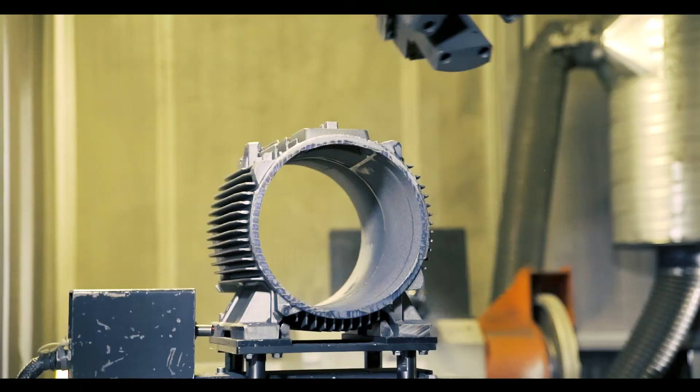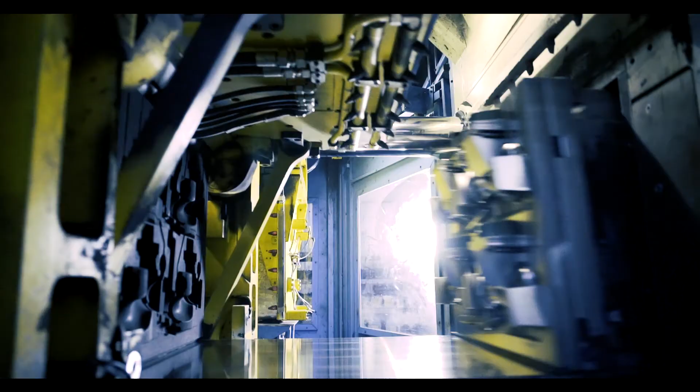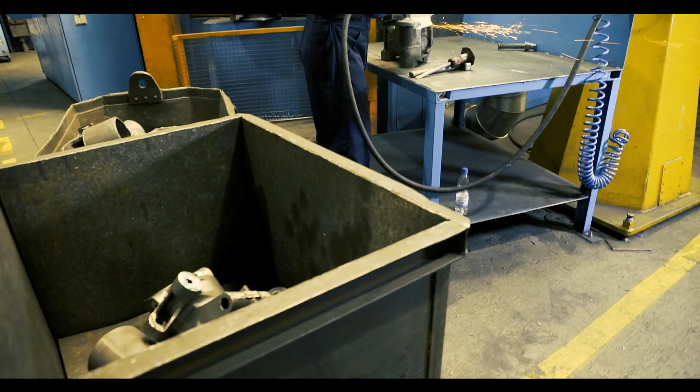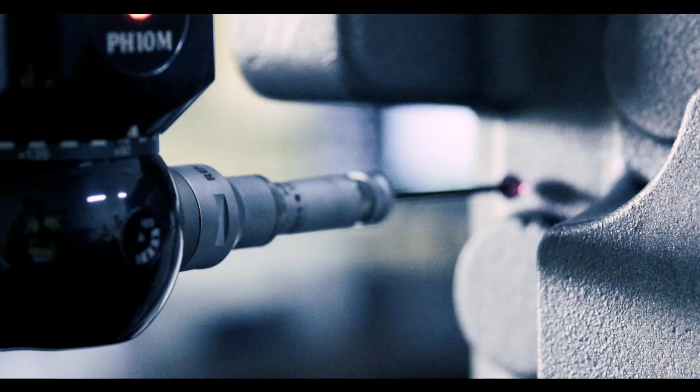Odlewnie Polskie SA is one of the leading service foundries in Poland. As a private joint stock company, it has been operating on the market for 25 years. Thanks to the high quality of products and numerous contracts, the company has for many years been able to continue its sustainable development and make investments in modern technologies.

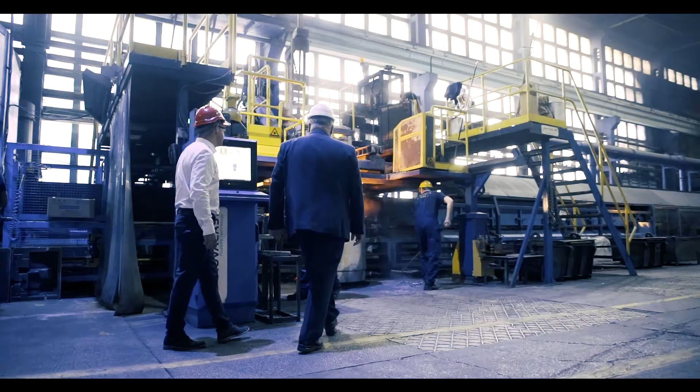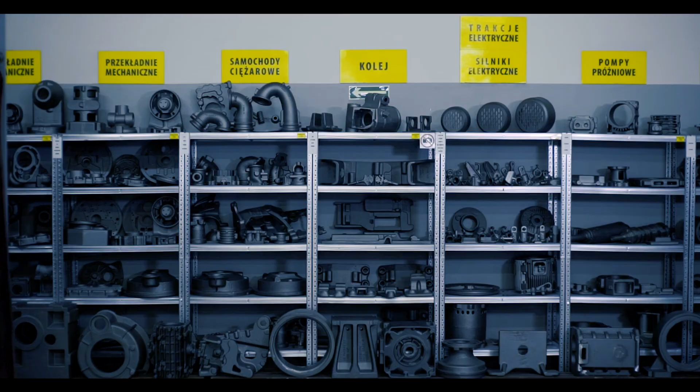Today, our foundry produces high-quality spheroidal cast iron and ADI, complex castings for cars and trucks, the railway industry, construction and agricultural machines, fittings and pumps. We sell them to almost all European Union countries, the United States and even China.

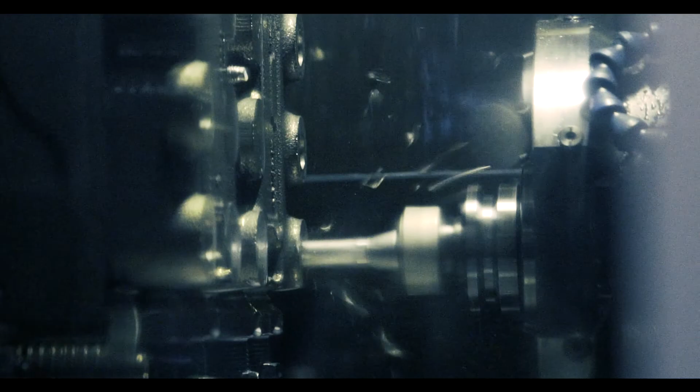Sustainable development is our motto, which we understand as investing in all areas of our operations. The result is a dramatic change in our plant over the last 25 years. A modern technology park, professional staff, and products that are 80% exported to foreign markets have allowed the company to build a market advantage.

Corporate social responsibility is as important to the company as operating in order to achieve planned profits. Hence, many actions are taken for the benefit of the local community and ecology. In order to protect the natural environment, Odlewnie Polskie implement the Green Foundry program, taking care of order and cleanliness of the environment. The location obliges.

Starachowice are situated among the exceptionally picturesque landscape of the Świętokrzyskie Mountains, the oldest in Poland. The foundry traditions of the Starachowice region date back to the end of the 19th century. In this picturesque region, in 1899, the blast furnace and the steelworks, which gave rise to today's foundry, were established. Today, the blast furnace is in a state of rest, providing an interesting tourist attraction.

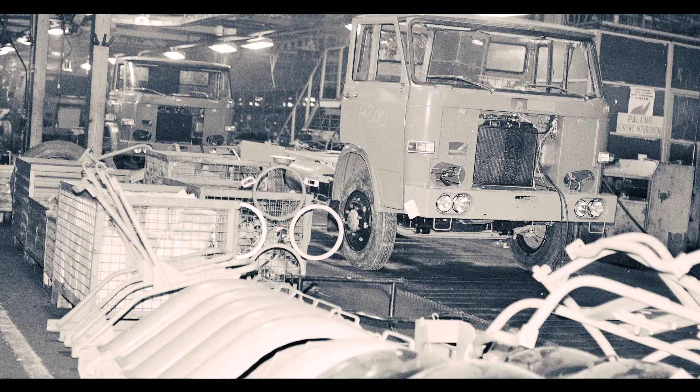After the First World War, in the interwar period, foundries as part of the Starachowice plant belonged to the Central Industrial District. Castings produced at that time were made for the benefit of the armaments industry. After the Second World War, the plant became part of the truck car factory, and until 1993, almost all castings for Star trucks came from the foundry in Starachowice.

Between 1993 and 2001, Odlewnie Polskie belonged to the Exbud Skanska Capital Group, and since 1998, the company's shares have been listed on the Warsaw Stock Exchange. In 2002, OP Invest became a strategic shareholder of Odlewnie Polskie SA, whose shareholders are the key management of the company. Thanks to this change, in 2005, a comprehensive modernization of the foundry was started, which has been the realization of an investment exceeding the value of 32 million euros.

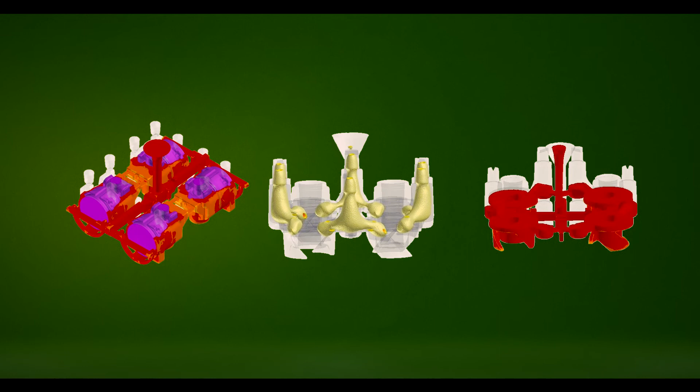It is thanks to these investments in new technologies that our castings are delivered to customers from the European Union as well as to Switzerland, Norway, the United States, and the Far East. Thanks to its technology, experience, and specialized staff, the company offers complex castings made of high-quality cast iron, processed to the maximum with mechanical processing or partial assembly.

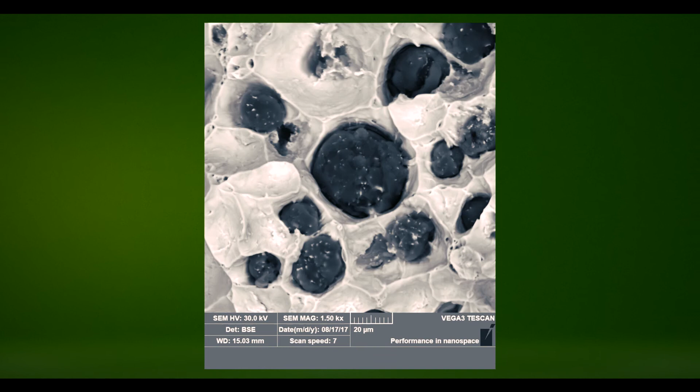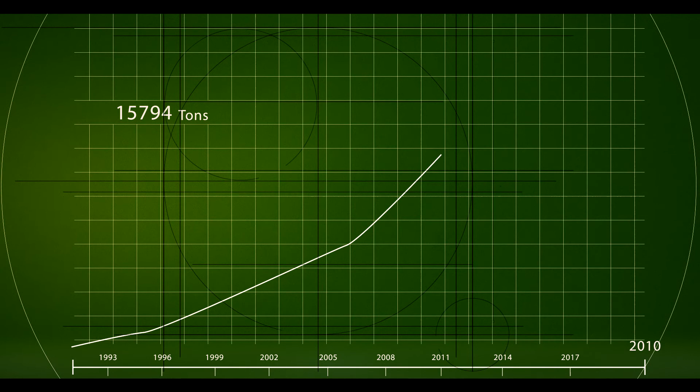Odlewnie Polskie SA belongs to the leaders in the production of ductile iron castings in Poland. The production also includes products of grey cast iron, SiMo, and ADI, of which it is the only producer in the country and one of only a few in Europe. The production of the foundry reaches 20,000 tons of castings per year, and thanks to the investments, the production capacity is constantly being increased.

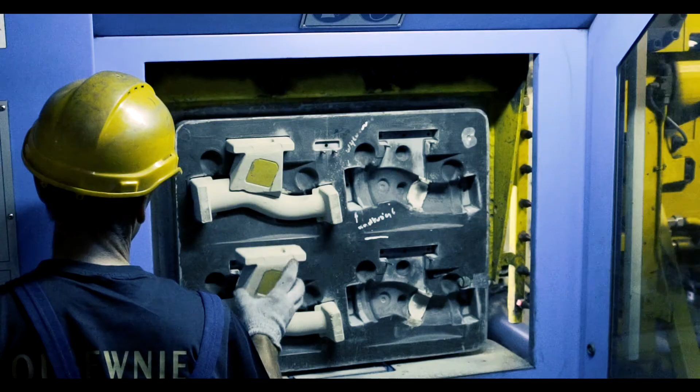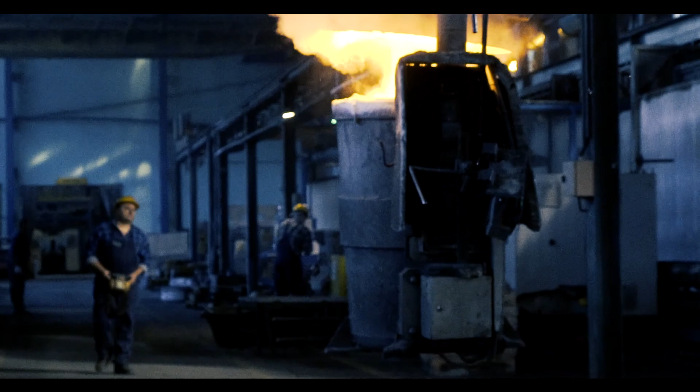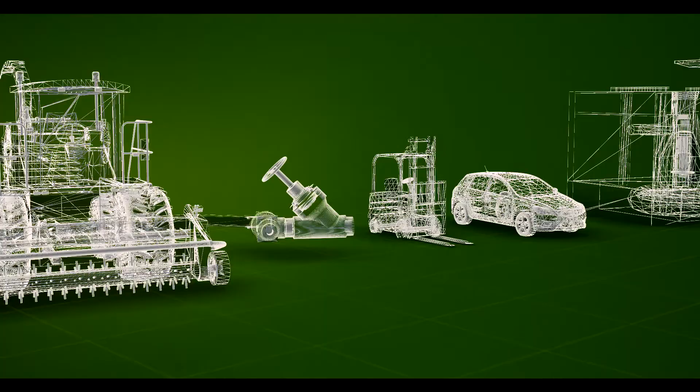Apart from mass production, the company also carries out short and medium series with on-time delivery and prototype castings, engaging in designing and improving the products of its customers. Odlewnie Polskie SA has a very diversified order portfolio. They provide castings for many industries, including truck, rail, construction machinery, agricultural machinery, fittings, forklifts, passenger cars and trucks, power equipment, and many others.

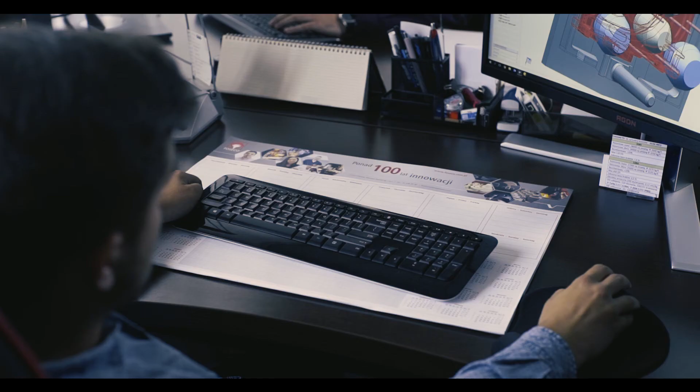The company offers comprehensive customer service, starting from design using modern computer software CATIA and NX Unigraphics, supporting production. The use of specialized software makes it possible to offer customers changes that improve the product in technical solutions and to optimize the production costs and properties of castings. In this way, in addition to meeting the strict requirements of customers, the company tries to offer them a better material, better quality, and accuracy of workmanship.

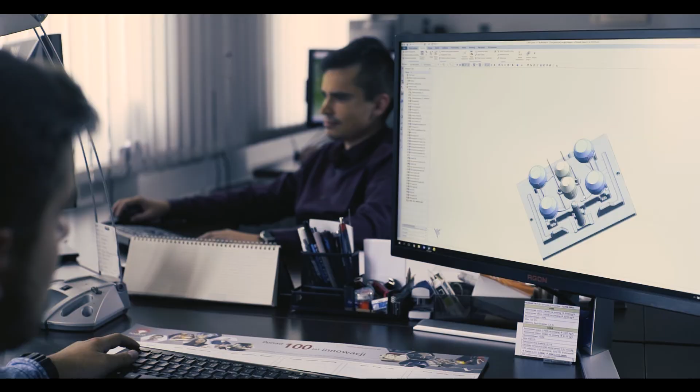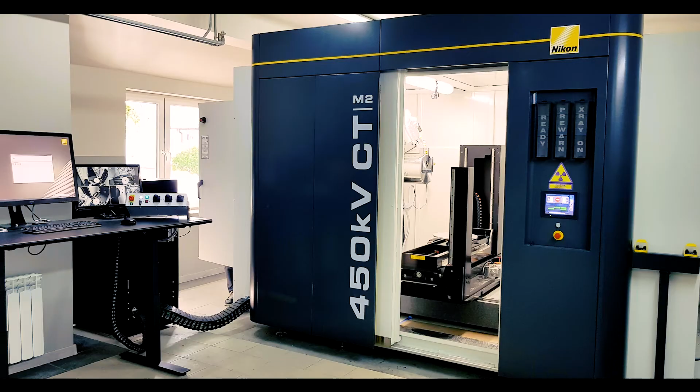ProCast computer program for simulating the process of pouring and solidification, and thus for optimizing the filling systems and analyzing the structure in terms of stresses and deformations. This reduces the time it takes to design and start up new parts and reduces so-called production shortages. The production startup process uses a Nikon CT scanner, which allows a practical assessment of the design technology.

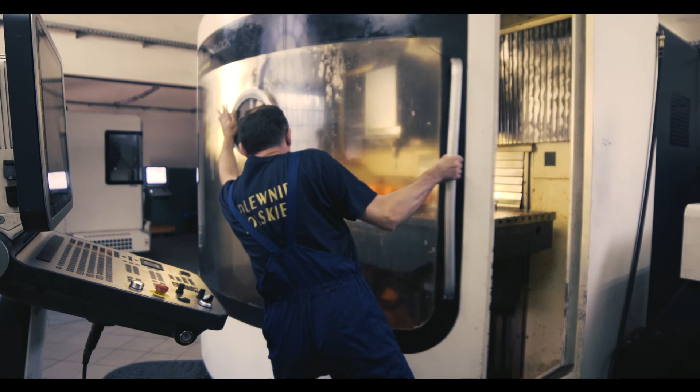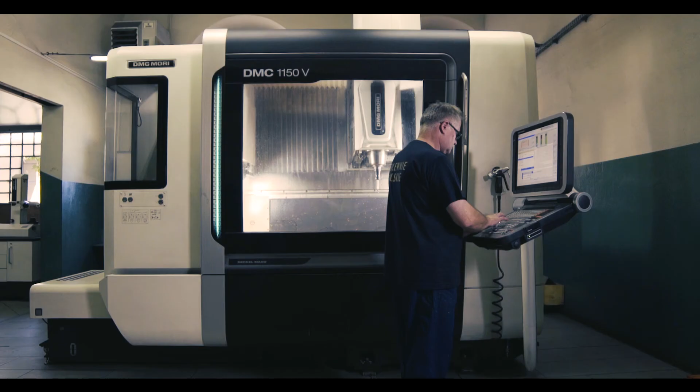After the design phase, the cores and models are manufactured together with the installation on the plates. Models made of metal and plastic are made. The models are made on 2 automatic machining centers, 5-axis universal milling machines from Deckel Maho. For dimensional inspection, SmartTech scanners are used.

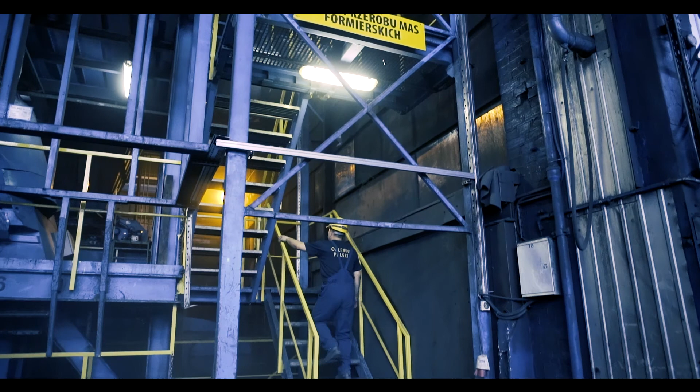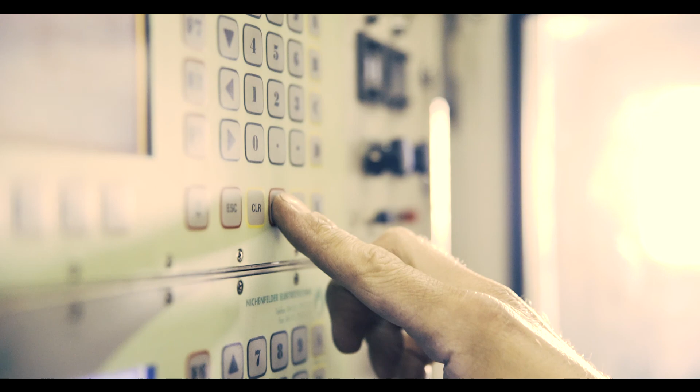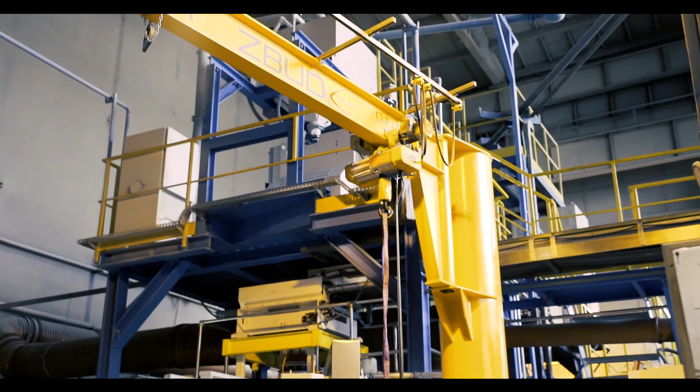The molding masses are prepared on the automatic sand processing station with a capacity of 66 tons per hour. The mass properties are automatically checked at the Michenfelder automatic molding regulator. The cores are produced using 2 methods: hot box with Shalco shooters and cold box with Laempe shooters. The cold box method is currently the most common method of making cores.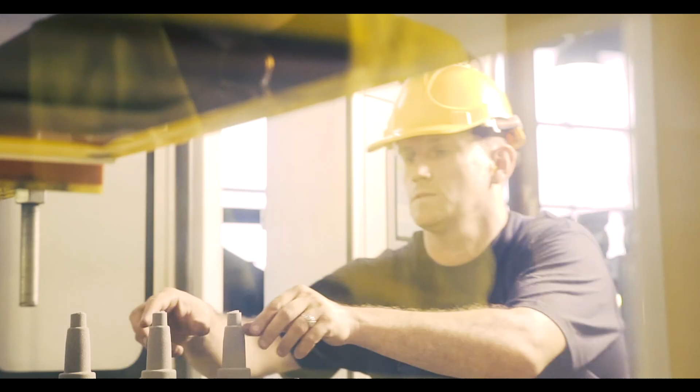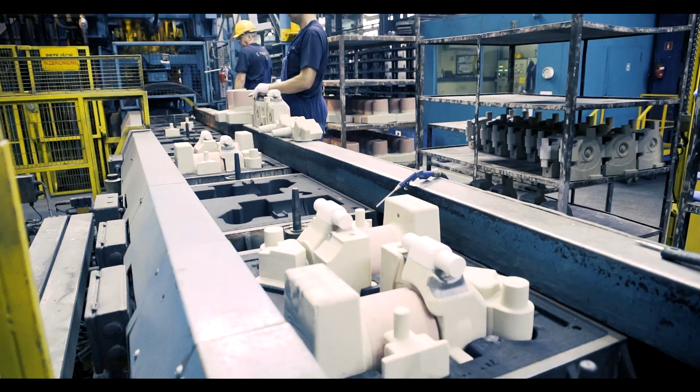The molds are produced on 2 production lines. On the automatic Loramendi flaskless molding line with vertical mold division with variable molding chamber and automatic core insertion. And on the automatic HWS molding line with horizontal mold division and robot-assisted core insertion.

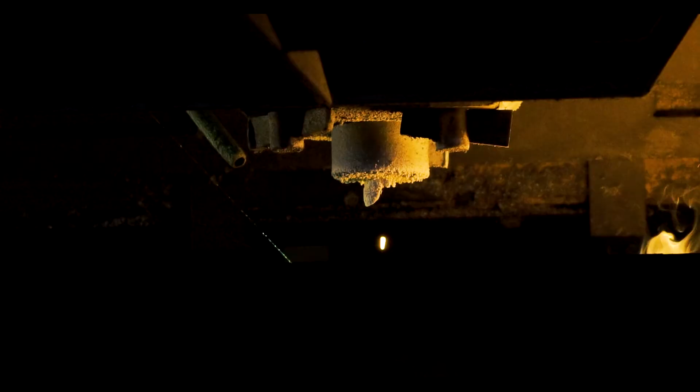The metal for pouring is obtained in a modern melting shop. It is supported by 3 medium-frequency induction furnaces, each with a capacity of 7 tons, with Otto Junker cooling systems and batch loaders. Pouring of the metal is done by automatic metal pouring machines with cold chamber, with the measurement of the pouring temperature on the stream and laser-controlled plug.

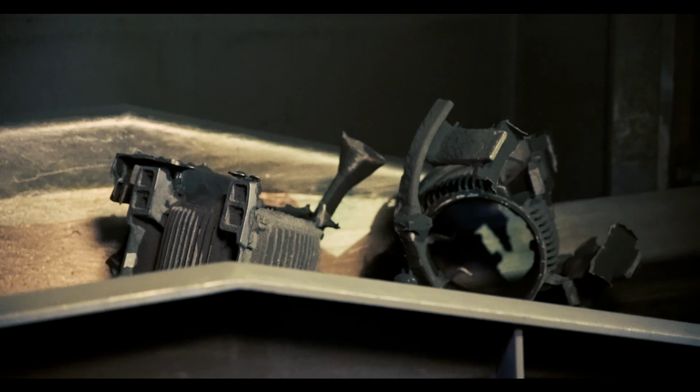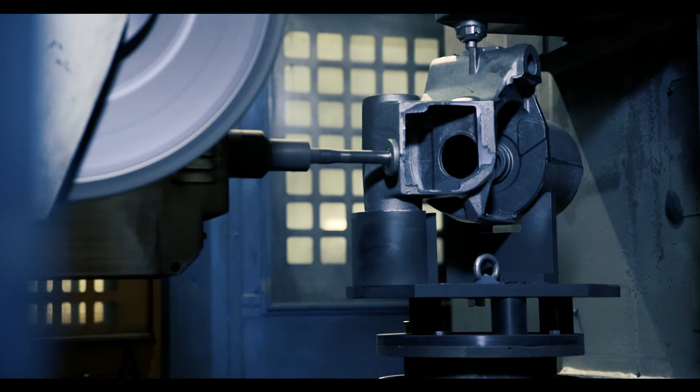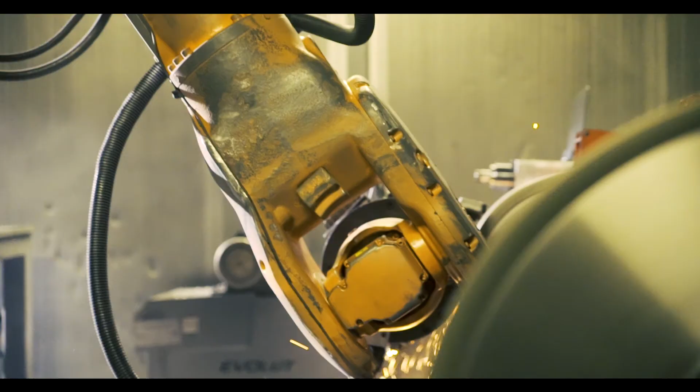Castings which have been knocked out from the molding compound are cleaned. Shot blasting is carried out using DISA, STEM, and Turbo Technica blast machines and rotary blasters. Grinding of castings is carried out on grinding machines of the Maus Company and with the use of 2 robots. The robots are equipped with a specialized camera and personal computer, as well as a measuring arm with a scanning laser head for programming and testing of castings.

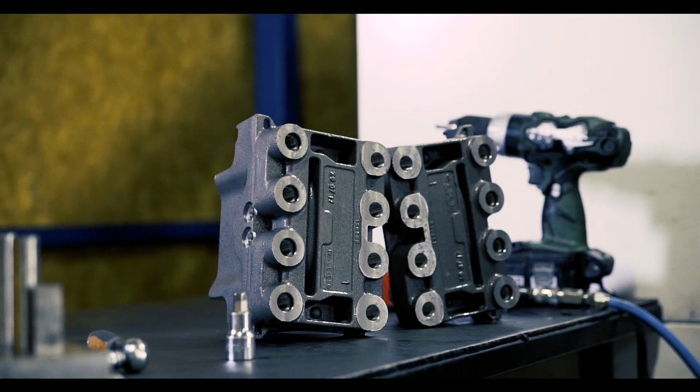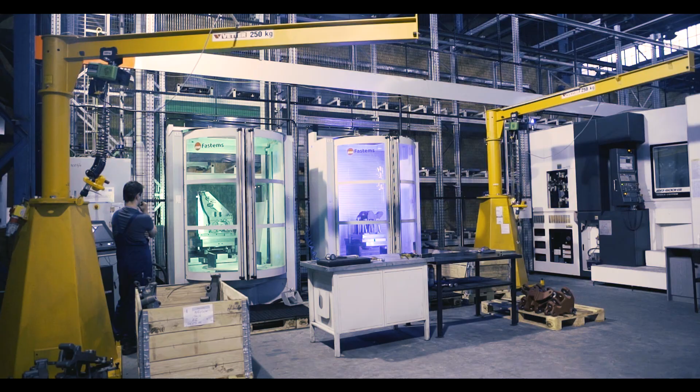Odlewnie Polskie may perform mechanical and thermal processing on their own and in cooperation with cooperating processing companies. The plant has several milling and CNC lathes and a modern, fully automated Fastems machining center from Okuma.

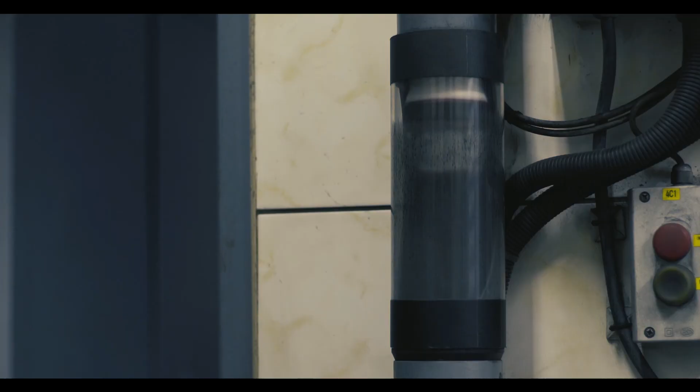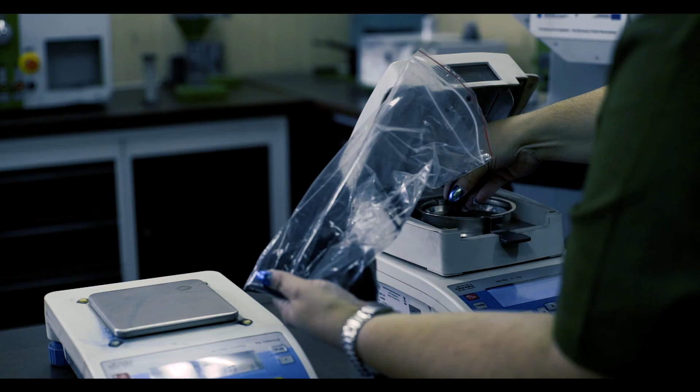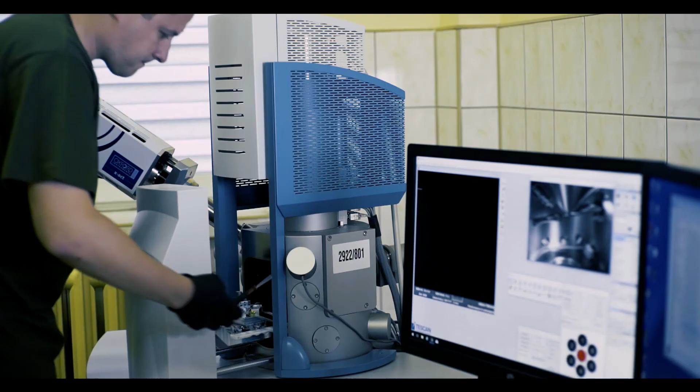Odlewnie Polskie SA in the process of control ensure rapid analysis of chemical composition, including analysis of trace elements and gases, together with analysis of input materials by means of 2 spectrometers, testing of the basic parameters of molding compounds, strength tests for casting alloys. Non-destructive testing for internal defects of castings is carried out using ultrasound and a tomograph. Examination of the microstructure of castings with very accurate microscopes, including a scanning microscope from Tescan, and dimensional testing of finished castings on Wenzel and Mitutoyo coordinate measuring machines and a 3D scanner.

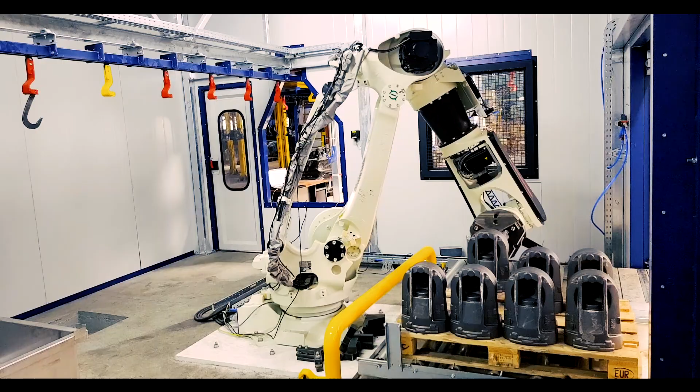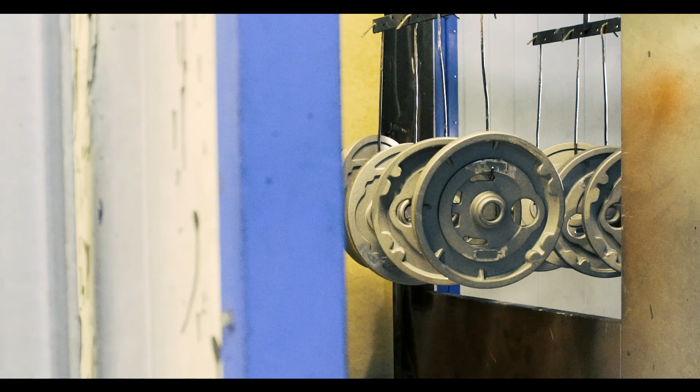Painting of the castings is carried out on 2 paint lines manufactured by the Adel company. Submersed painting is carried out using a robot. The paints used in the painting process are friendly for the environment, as they are produced on the basis of coniferous tree resins. The customer can choose from a wide range of colors.

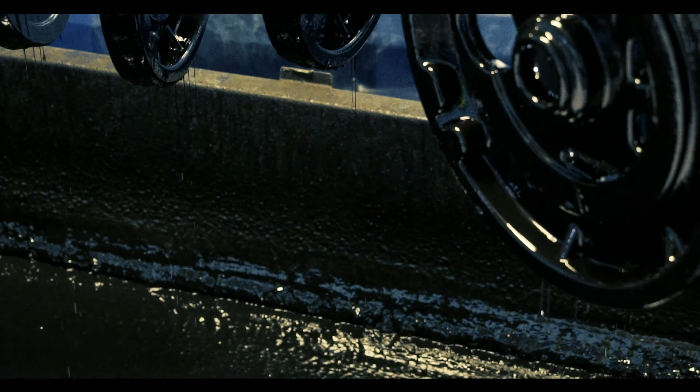After completion of production and quality verification, the products can be packed and shipped according to customer requirements. On request, the casting is available with machining, galvanizing, cataphoretic electrophoresis as a ready-to-mount component.

Since 1996, Odlewnie Polskie SA has been operating a certified quality management system in accordance with the current ISO 9001 standards and a management system in the field of environmental protection of ISO 14001. The recognition of our brand is confirmed by the fact that we belong to Polish and international organizations associating leading foundries, such as the Association of European Foundries, or CAEF, the Technical Association of Polish Founders, the Foundry Chamber of Commerce, the Comcast Foundry Components Producers Cluster.

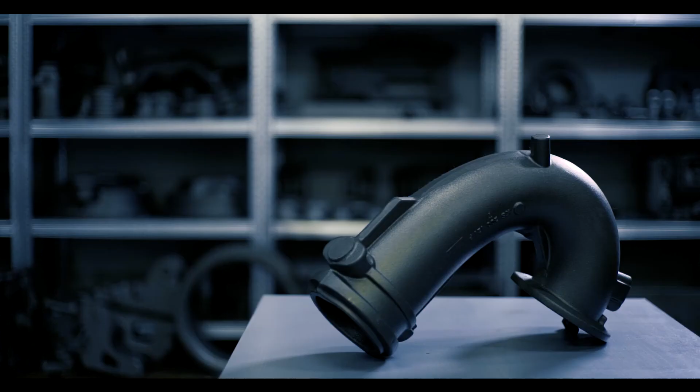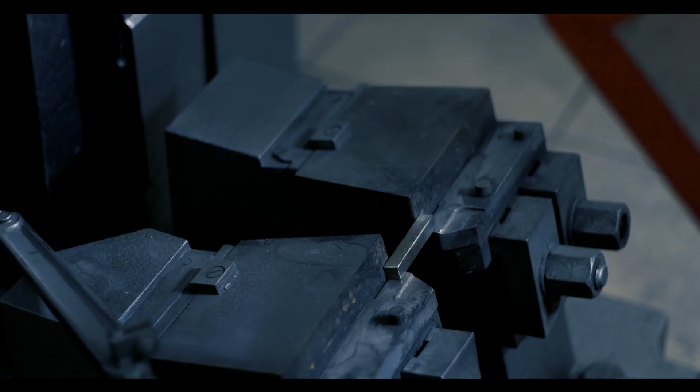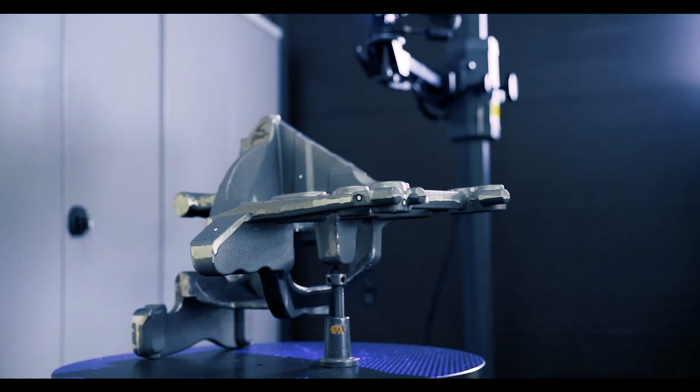Responding to the market needs, the company created the first research and development center for foundry components in Poland, abbreviated as OBRKO. Innovative resources of the center's studio were co-financed from the Operational Program of Development of Eastern Poland and the Operational Program of Intelligent Development. The objective of the Research and Development Center is to implement technological innovations in the production process of casting components in order to improve their competitiveness, including quality, punctuality of deliveries, and manufacturing costs.

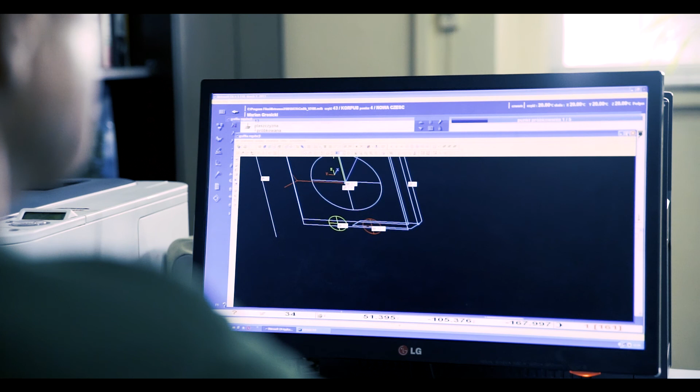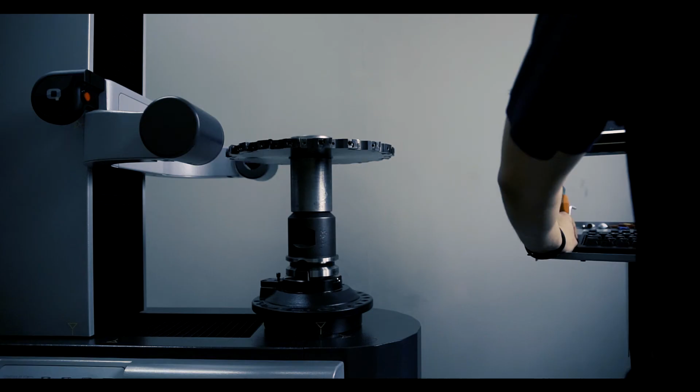Some research and development works are carried out as targeted projects, which are co-financed from the European Union aid funds. The projects are carried out in cooperation with technical universities and research institutes, mainly the AGH University of Science and Technology, the Foundry Institute in Krakow, and Świętokrzyska University of Technology in Kielce.

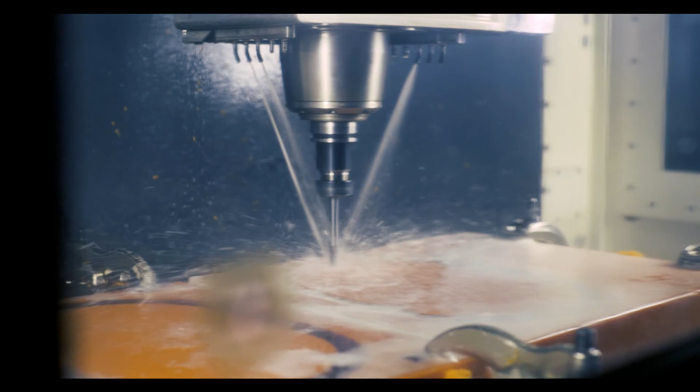Innowacyjny rozwój Odlewni. The innovative growth of our foundry is determined by the expectations and requirements of our clients. This inspires our research and development activities, including projects carried out with our clients. The cooperation of our programmers with the customer's design offices resulted in the production of a series of complex castings with the features of light bionic constructions.

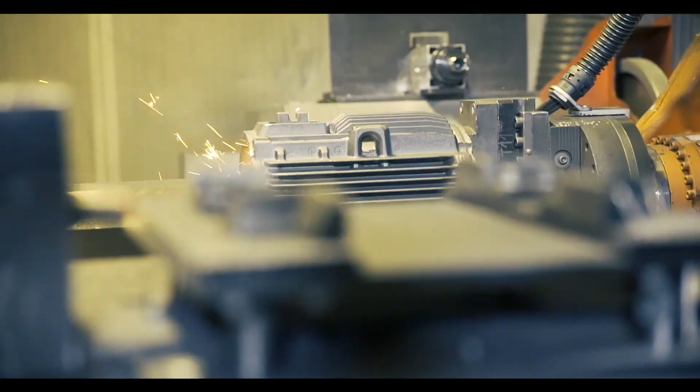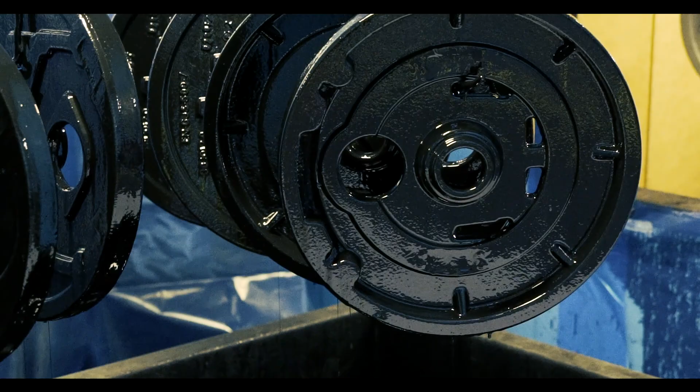Highly durable ausferrite cast iron displaces other construction materials from the market. Robots are introduced for the toughest operations, such as cutting off the gating systems, cast grinding, and even painting them. Implemented non-destructive testing systems, including computed tomography, guarantee meeting the highest quality demands. The company's energy policy assumes the implementation of a production process based on the energy management system, including the recovery of technological heat and the use of energy from renewable sources in the foundry's surroundings.

Odlewnie Polskie SA.